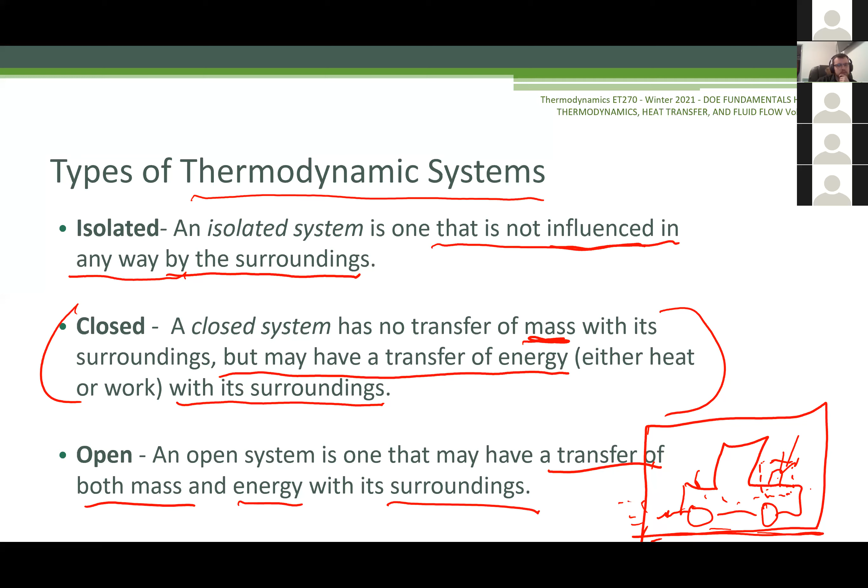Yeah, air has mass. There's 14.7 pounds of pressure sitting on every square inch of your body right now. And if the pressure went to zero, you would explode. It wouldn't be any good for you - the cells and molecules in your body would start doing weird things. So air has mass, yes. We're like fish at the bottom of an air ocean. If you took us out of the air, we wouldn't know what to do.

All right, this is more stuff about thermodynamic systems. So, thermodynamic equilibrium.

When a system is in equilibrium with regards to possible changes in state, that's when the system is in equilibrium. For example, if my room temperature is 72 degrees and my thermostat setting is 72 degrees, right now that room is in equilibrium, because if you consider the HVAC as the system that feeds the room, and you consider its feedback, the temperature sensor on the thermostat, once it reaches 72 degrees, it's in equilibrium with the system.

But is it, though? If you think about that 72-degree room, and the room next door to it is at 65 degrees, there's no equilibrium. So then there's heat transfer. Heat always travels from hot to cold, and that's going to be another thermodynamic law that we're going to learn about.

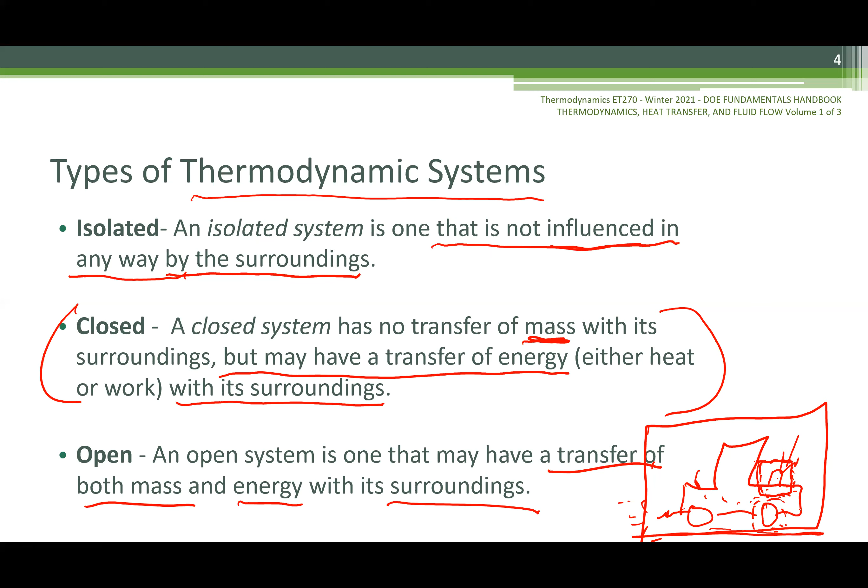So steady state is a circumstance where there is no accumulation of mass within the control volume. The system is independent of time. So how can I explain this one?

So let's say we have a tube. This little line right here that I'm drawing is a 5 millimeter diameter glass tube that goes like this, and then it spits out. Let's say we pour water into the tube, and then water comes out of the tube.

Let's say this tube takes 5 seconds to start water leaving from the bottom end. For water to begin leaving the bottom of the tube - basically it takes 5 seconds for any water entering the tube to reach the end of the tube.

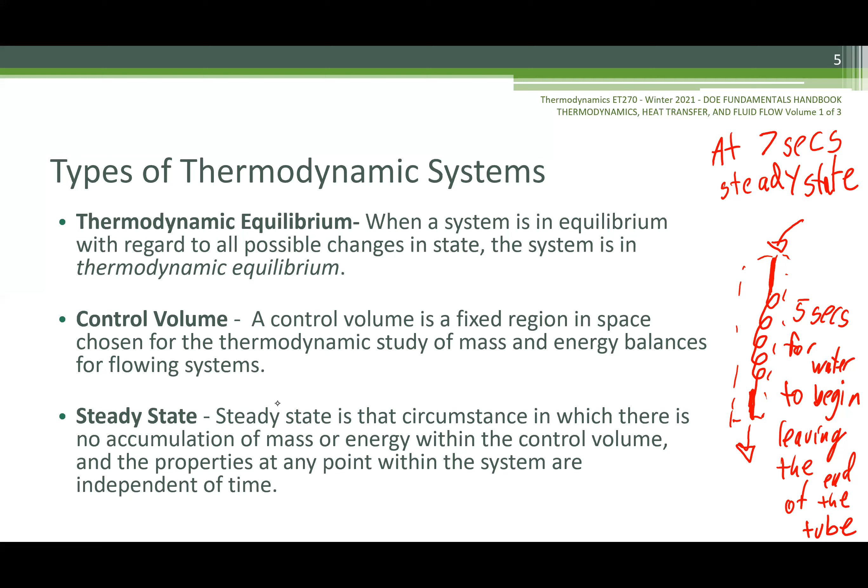All right. So here are some more thermodynamic processes. Whenever a property of a system changes, a change in the state of the system occurs.

So what's a property? You'll understand that more later. We're talking about properties - we looked at specific enthalpy, specific volume, specific internal energy, specific energy. Those are all properties of a system.

So here are just some of the processes that systems are categorized as. When a system in a given initial state goes through a number of different changes in state and finally returns to the initial values, the system undergoes a cyclic process.

A cyclic process would be a radiator in a car. That fluid really never changes, right? All it does is take heat and dumps it to the environment. It takes heat from the engine, puts it in front of your car, then in front of your car blows cold air through the radiator to cool off that radiator fluid, and that radiator fluid goes back through the engine to take more heat away from the engine.

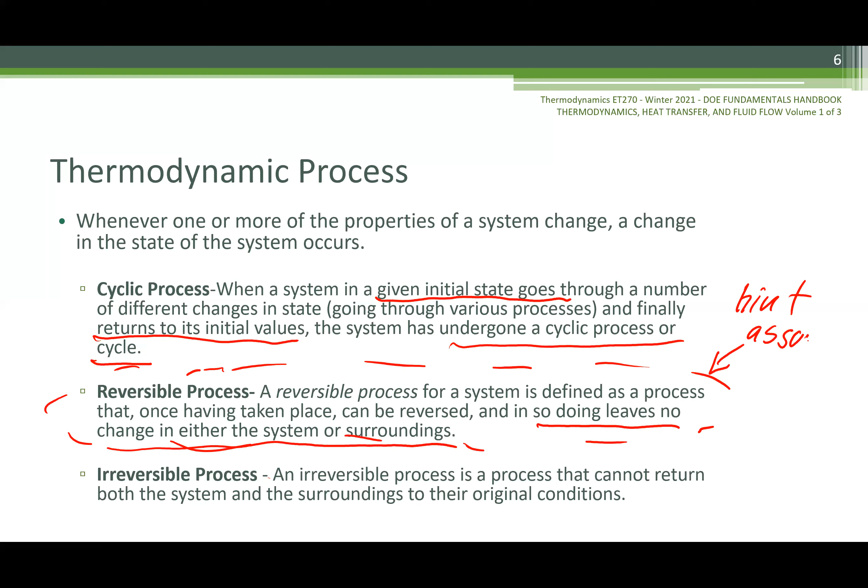There are whole books about entropy, and you still won't get it. All right, now irreversible - we just talked about that. It's the opposite of reversible, and usually is what the system is actually looked at as. But a lot of the processes we will look at will be treated as reversible - this will be an assumption that you make. You might say, 'it's a cyclic process and it's reversible.' I'm assuming it's reversible, because if you don't assume that, then where's the entropy and the heat loss, and where's this and where's that?

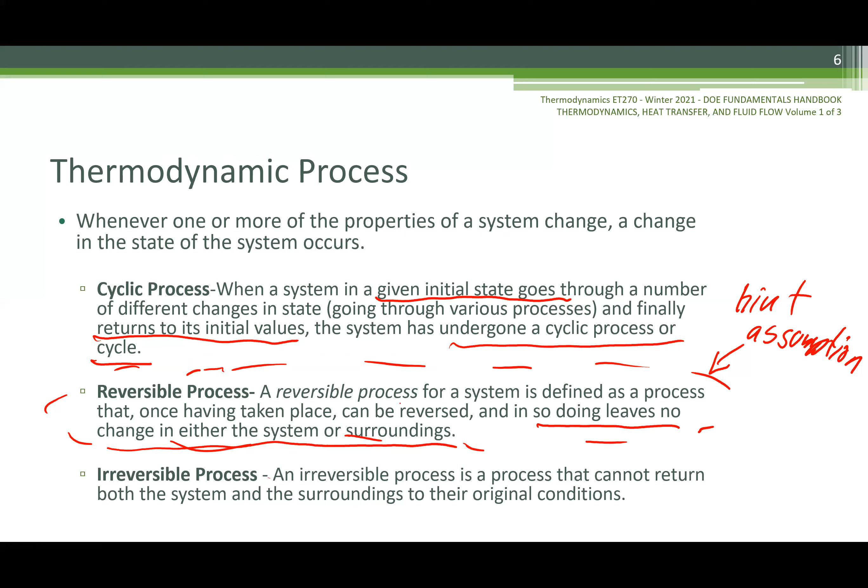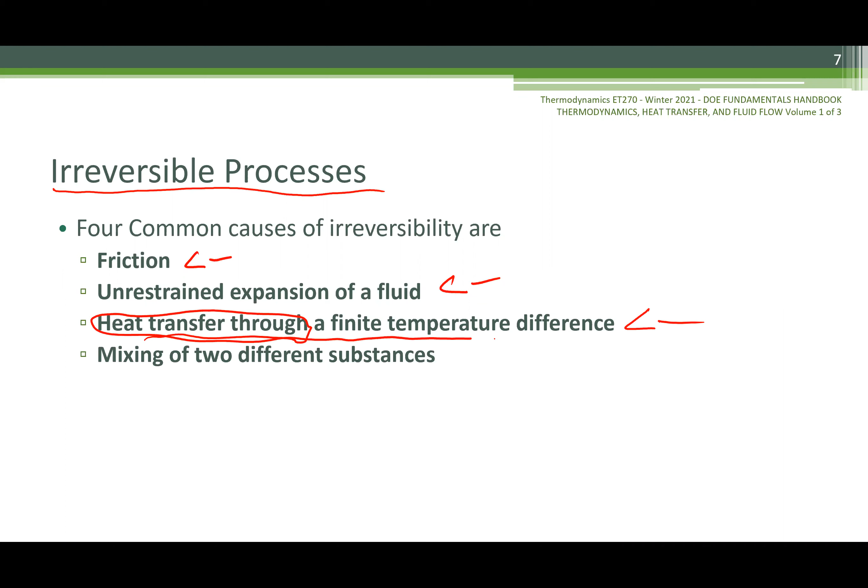All right, so this is just talking about some of the things we were discussing. What causes irreversible processes? Friction, just like our radiator example. Unrestrained expansion of fluids - happens in radiators too. Heat transfer through a finite temperature difference - this is impossible to stop if you really think about it. A finite temperature difference means a measurable temperature difference, right? There's a temperature difference for everything. So it seems everything we do is always an irreversible process, because there's always a temperature difference in everything we do.

And then mixing of two substances - when you mix two substances and go through a chemical reaction, how easy is it to unmix those two substances? It's not, you can't do it, right, without putting some type of energy into the process.

And making it equal - I just need to make sure you guys know what I mean when I say energy. If a process takes, let's say I mix two substances S1 and S2, and they go to this substance S1 plus S2, and it gives off heat equal to 20,000 BTUs. I guarantee, I bet my life savings, that it takes more than 20,000 BTUs to separate these substances back into S1 and S2.

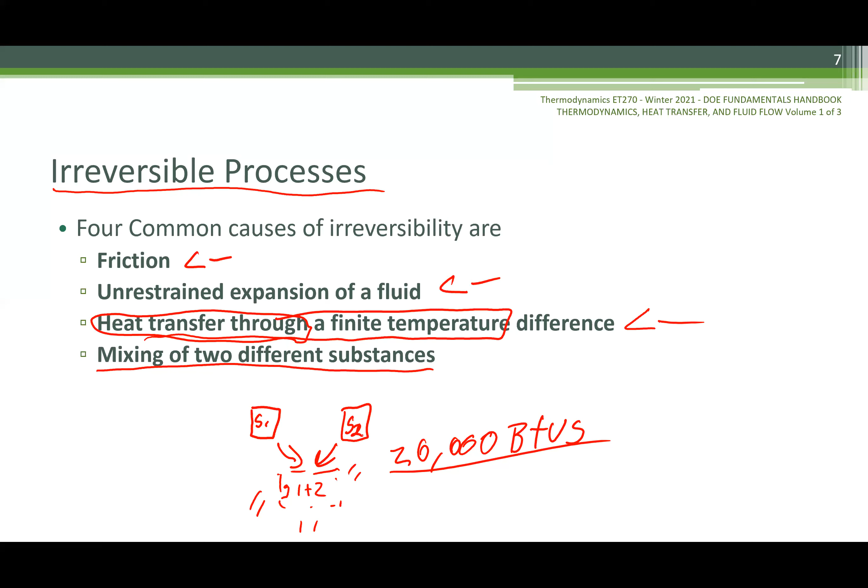An adiabatic process - this is a cool word I remember from my class. It's one in which there's no heat transfer in or out of the system. The system can be considered perfectly insulated. Now, is there any such thing as an adiabatic system where heat is not transferred in and out? No, there's no such thing, but it's part of that reversibility concept.

It's part of the concept. I am not considering the heat right now. This process is adiabatic. I'm not considering its surroundings or anything. It's perfectly insulated from everything. Are there any questions about that?

Isentropic process is one in which the entropy of the fluid remains constant. This will be true if the process the system goes through is reversible and adiabatic. So an isentropic process has to be reversible and has to be adiabatic. It can also be called a constant entropy process.

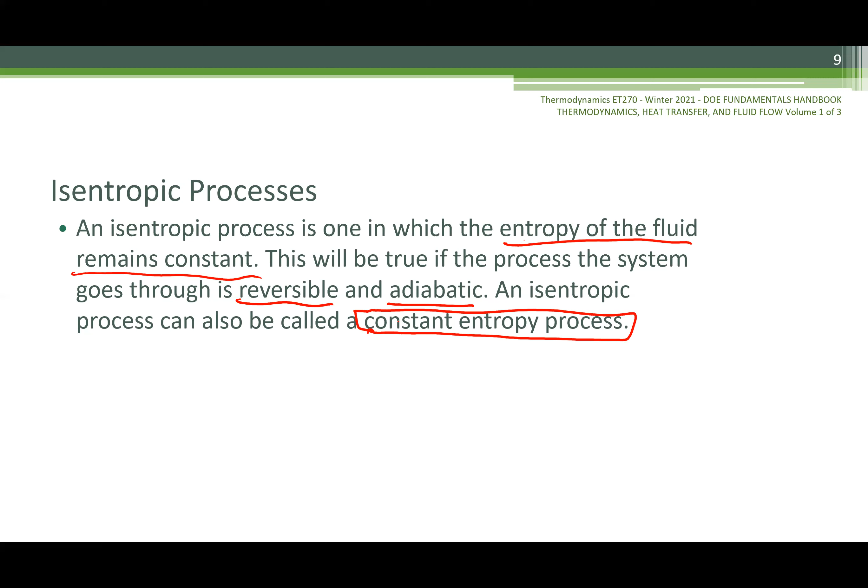So I just said, in order to equal isentropic, if it equals isentropic, then it's equal to reversible, and then it's being adiabatic.

Now here's a question: does an adiabatic process have to be isentropic? I don't think so. No, because it can be irreversible. I said no because it can be adiabatic and irreversible, and then it wouldn't be isentropic, right? Yeah, that's very true. It can be adiabatic and irreversible. Exactly.

Let me finish writing this. So, does an adiabatic process have to be isentropic, and we have said no. And we said no, and you're saying it's because it can be irreversible and adiabatic, right?

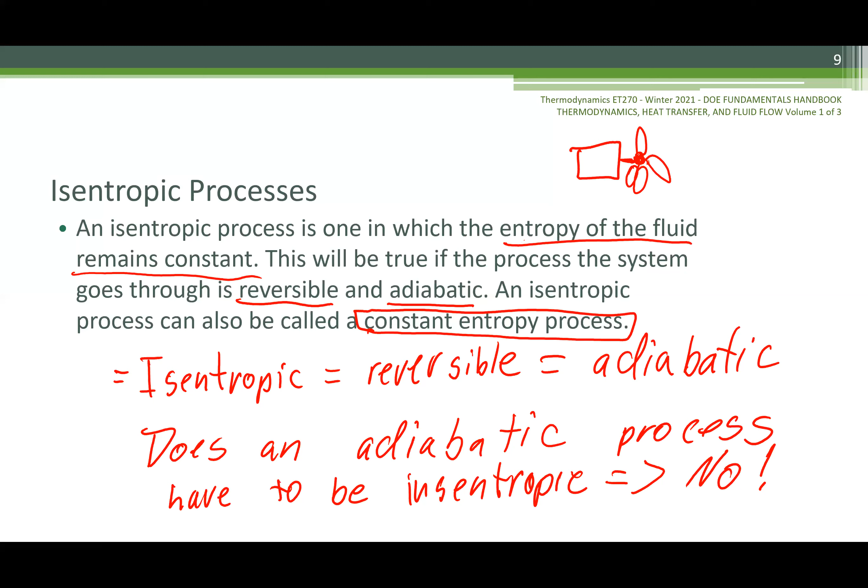So give me - this might be a little bit too much, but I'll give this one to you. Let's say we have an engine and it turns a piston. We have a motor and it turns a fan. We're not even looking at this fan. We're looking at this right here, the three leads of electricity going into the fan.

And then we're thinking about the energy coming into the motor, and then we're looking at the actual motor turning, right? So we know that the motor turning and the electricity is not a reversible process. I cannot turn the motor and put the amount of electricity back into the wires that the wires have supplied to the motor.

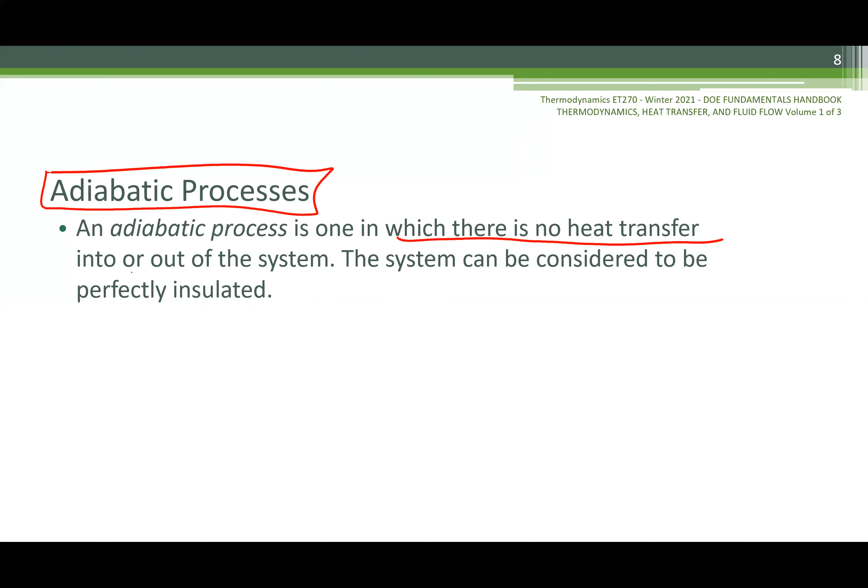But I can consider this process adiabatic, saying the temperature here is the same as the temperature here. So because it's adiabatic, we're saying there's no heat transfer in or out of the system. So we're saying, hey, this system up here, we're just looking at it for the electricity and the mechanical energy it produces. We're saying that the heat does not matter. It's an adiabatic process.

You see how that can be useful? We don't even care about the heat right now. We're just looking at the electrical energy coming in and the mechanical energy coming out. But it's not isentropic, right? Because, like I said, it's irreversible. So it's not a constant entropy process.

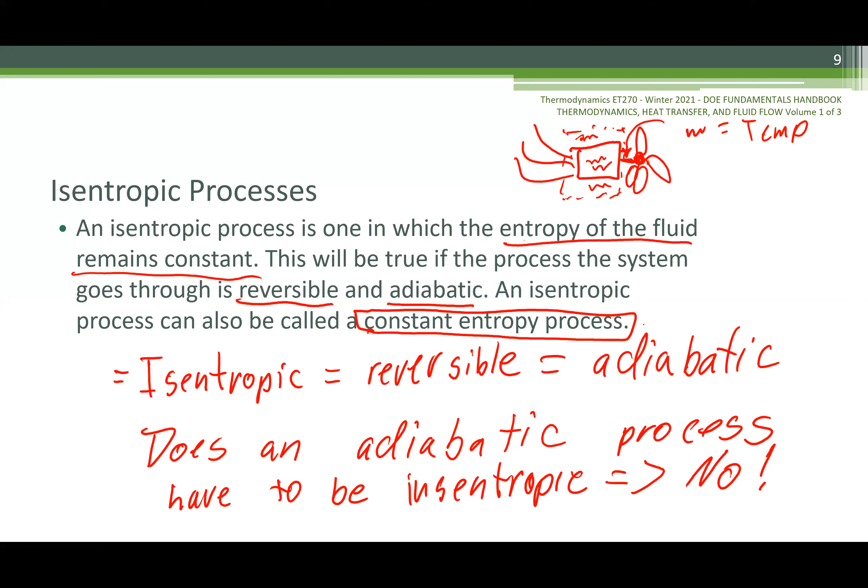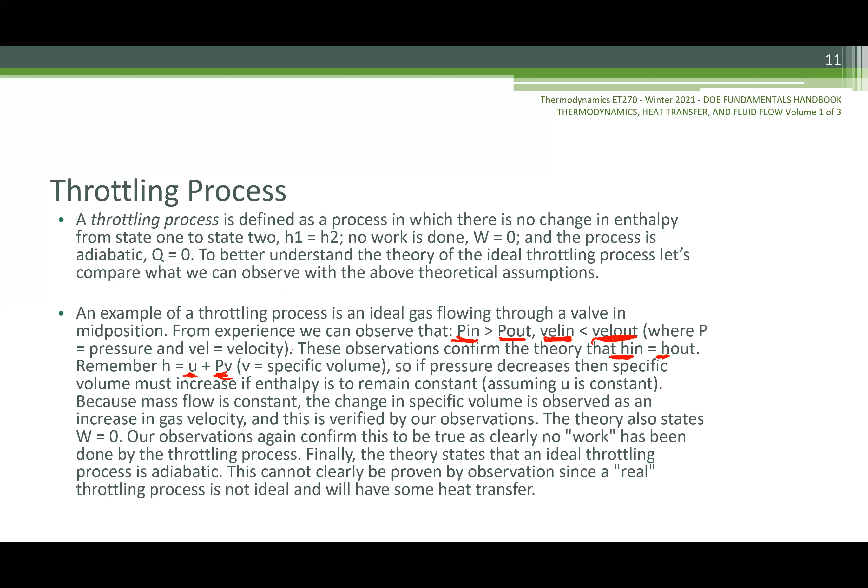These observations confirm the theory that H-in, enthalpy in, is equal to enthalpy out. Why? Because H equals the internal energy plus the PV energy. So if pressure decreases, then specific volume must increase if enthalpy is to remain constant. We are assuming the internal energy of the ideal gas is constant. Since mass flow is constant, the change in specific volume is observed as an increase in gas velocity, and this is verified by our observations.

The theory also states that work equals zero, so no work was done. It just changed in its specific volume, and that change in specific volume was compensated by the change in velocity and pressure.

Finally, the theory states that an ideal throttling process is adiabatic. This cannot clearly be proven by observation since a real throttling process is not ideal and will have some heat transfer. But this is the basic way that we analyze throttling processes. We'll look at it where...

Q equals zero, so it's adiabatic, and we're saying zero work is done. So we're saying, oh, it's a throttling process, and H1 must equal H2. So that relationship, P times V must stay the same, it must be constant, right? Pressure and volume can change, but what they equal in the last thing we talked about, which is PV to the N equals constant, must remain the same in order for a throttling process to be true.

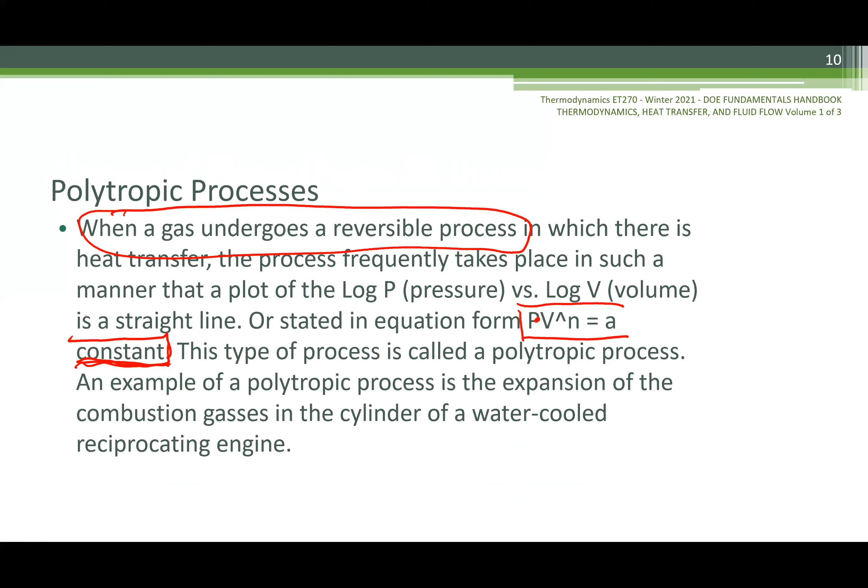To be really considered a throttling process, that again makes it easier for us to analyze the system by considering: hey, this is the throttling process, no heat transfer to the surroundings and no work is being done, H1 is equal to H2. Then you can analyze this system because you know these relationships. Thermodynamics is all about knowing the relationships.

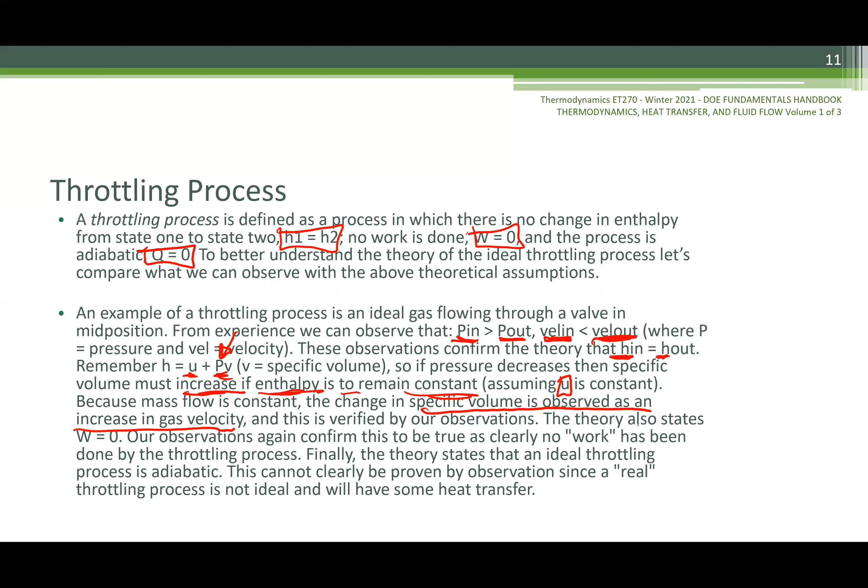All right, change of phase, page 31 through 39. Before we go on to change of phase, we can take a little break if you guys want to talk. I threw a lot of information at you, a lot of definitions, a lot of processes. Your head might be spinning right now. So if you don't have any questions, I understand, but if you have some questions, I'll happily go back and try to explain better.

I'm personally good. There's definitely some stuff that might be a little more intense, but it seems like once we do the homework, it might become a little more clear. But I'll let someone else ask in case I need to. You guys good? Feel free to ask, man, we're all trying to learn here. Oh, I'm good. I'm okay. Good. All right.

Okay, so now we're going to start looking at phases. What is a phase? A phase is different states - a phase is like a liquid. There are three phases of water: liquid, gas, and solid. Water is a working fluid that we use often.

So now there have been tables generated for different types of substances that we can use in order to tell what phase that liquid, solid, or gas is in. Guess what those properties might be that we can use to tell what phase a substance is in? They're specific... No answer? Like specific heat, or specific volume, yes, yes. If you know two of those properties about a substance, you can find everything else about that substance.

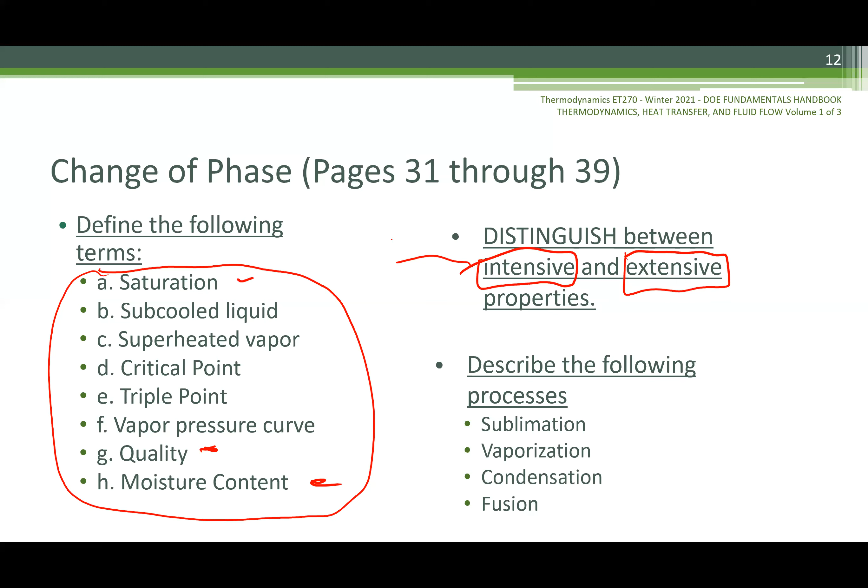So we're going to distinguish between intensive and extensive properties. The intensive, what are these? These are the specific properties.

And then we're going to describe some of these other processes, which are sublimation, vaporization, condensation, and fusion. All of these processes, you have forced water to go through at one point in your life. You just didn't know that you were making it vaporize, condense, fuse, or even sublimate. Sublimation is the coolest one, you'll see why.

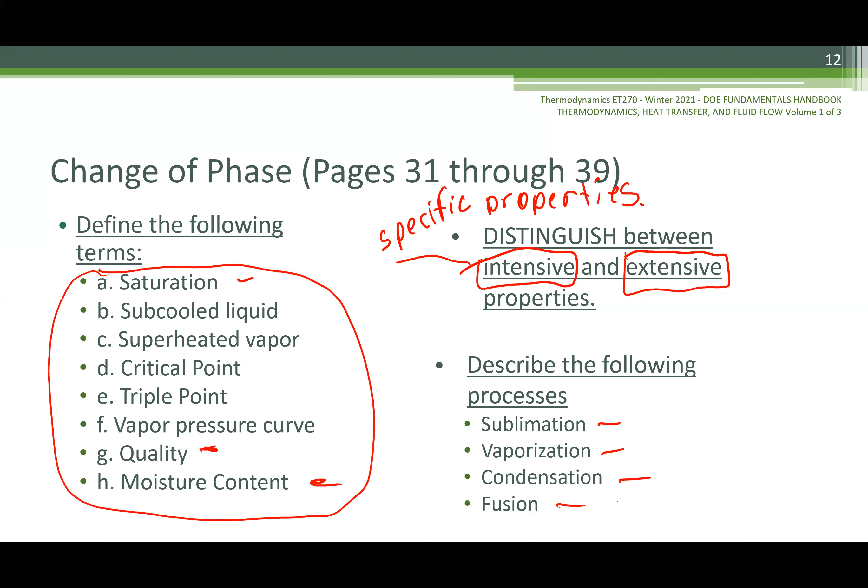All right, so classification of properties. We've been talking about this all term, but we can't talk about it enough. Intensive properties are independent of the amount of mass present. That's why we divide it by mass, because if we want to know the total of that intensive property, we multiply it by mass to find the extensive property from intensive properties.

Extensive properties are a function of the amount of mass present, just like I said. So we'll do little v. What does that equal to? Feet cubed divided by mass, right? So a function of mass. So to find big V, it is equal to little v times mass, and that will make you just have volume in this example. Does that make sense? Yes. All right.

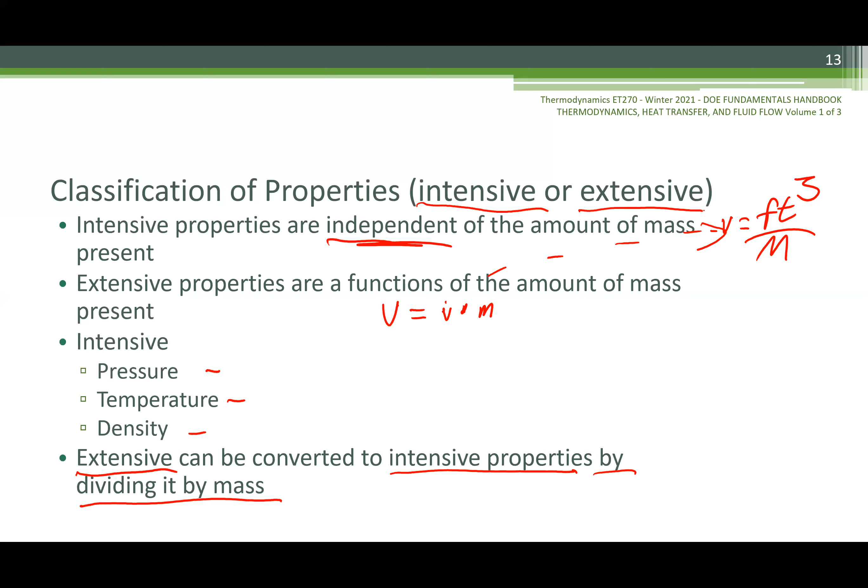Intensive properties: pressure, temperature, density. And extensive properties can be converted into intensive properties by dividing by mass. It is so important for you to understand the difference between intensive and extensive properties in this class. Their intensive properties give you the information to find out the extensive properties. Then once you find out the extensive properties, you can find out how much work, how much heat, or how much anything is being done. But you can't do it without the intensive property. You'll get an example later on in this lecture, but it's important to show you the importance of the intensive property. And here's one.

Here's a change of phase. So A, this is water, it's at 60 degrees and 14 psi. So B, it's that same piston, it increases in specific volume and pressure is constant. So something must be added to it because of that, so heat must be added to it. Then in C, it says water at 212 degrees, specific volume is steady and uniform.

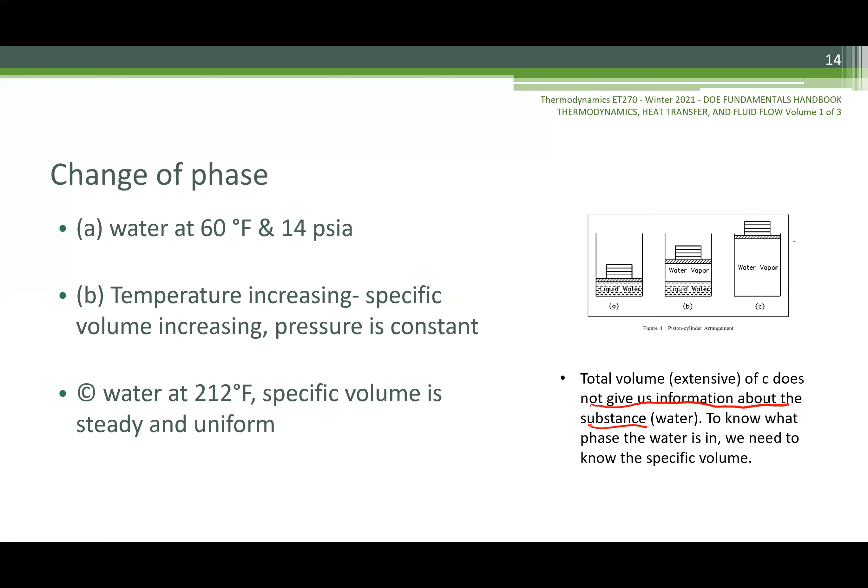So total volume, extensive, of C does not give us information about the substance. Why is that? Is it because we have no mass? We don't know the mass, exactly. For all we know, it could be liquid water or water vapor. Since we don't know the mass and how much it weighs, all we know is the volume. It could basically be taken up by any phase of the water until we know the actual mass.

So let's just say this here is irrelevant, we don't know any of this, and this here is irrelevant too, right? Now I'm going to ask you a question. If we knew the volume of this, is it possible for there to be 0.002 lbm of water in there? Yes, because it could be gas. Exactly. Is it possible for there to be 1,000 lbm of water in there? Well, if it was ice and there was enough ice to reach 1,000 pounds, definitely — but we don't know anything else.

Now let's say we still don't know the mass, but we know the volume, okay? Now let's say we also know the pressure. Can we find out what phase that water is in? Yes, we could, right? Because we could do all the math to see what pressure, in pounds per square inch, the water is pushing on the outside. Then we can convert that and look at the PSI along with the volume we know. Do we have enough though? I don't know, I think we need temperature.

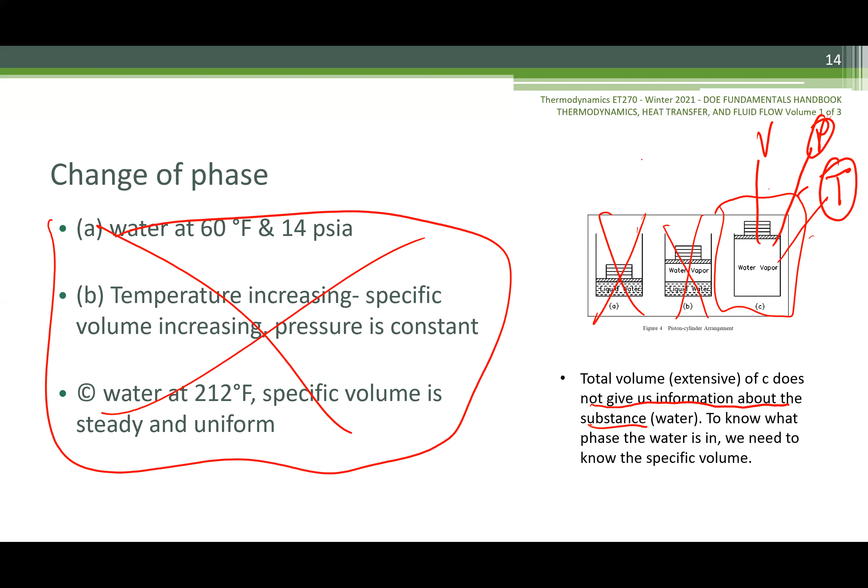All right, so now we're going to move on from the importance of understanding intensive properties using this example. And hopefully you'll remember one time while you're doing your homework, what's the importance of pressure and temperature.

Now we're going to look at the saturation vapor line. So saturation defines a condition in which a mixture of vapor and liquid can exist together at a given temperature. For example, saturation temperature or pressure is when a substance begins to boil. Water is 14.7 psi, which is atmospheric pressure at elevation 0, and 212 degrees. So at that pressure and temperature, water can exist as either a vapor or a liquid. Have you ever noticed that even though your water is boiling, it's not completely vapor? You still can feel the moisture in the air and it still can touch you and make your hands wet, because it's not all vapor. You breathe in water through your nose all the time, that's vapor.

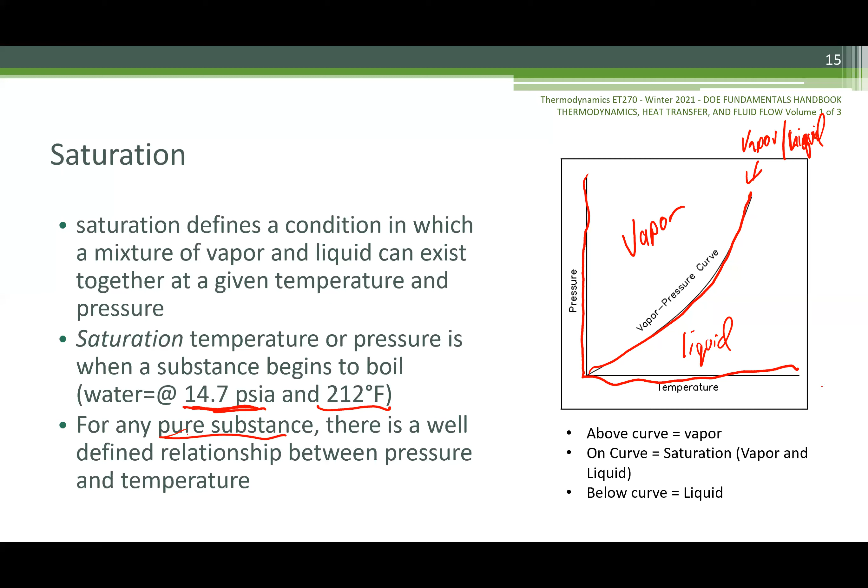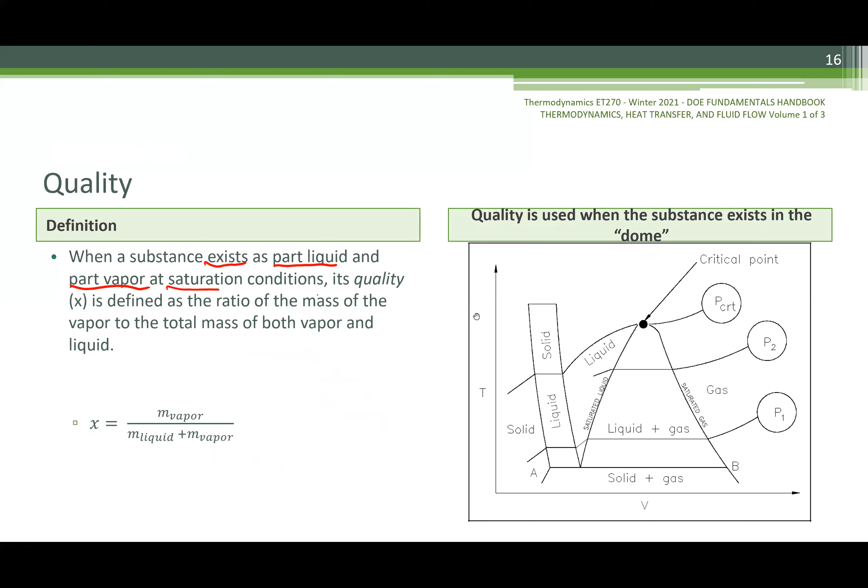So now we're going to talk about the quality of that substance. What is quality? It's when the substance exists as part liquid and part vapor at saturation conditions. So saturation conditions for water is here. Even though something along this line can equal a vapor and a liquid at the same time, we do not know the quality. QUA, quality. What is the quality? It's defined by the ratio of mass of the vapor to the total mass of both vapor and liquid. So if at 212 degrees, you're saying, okay, what part of it is vapor and what part is liquid? When we're thinking about gas, we're thinking about water. Well, you're talking about the quality - what percentage of that control volume is vapor?

And here, realize these axes have changed significantly. Quality is used when a substance exists in the vapor dome. Now what I mean by axes - notice that this one is temperature and this one is specific volume. Now I'm going to go back to the other one: this one was pressure, and this one was temperature, right? So that's the relationship between pressure and temperature. But now I'm going back to the other one to say, all right, this is the relationship between temperature and specific volume.

And here's where it's really going to mess with you: this line here - you see this dome right here? Notice it says saturated liquid, saturated gas. This line here, I'm going to star it - it is the same line as here. It's just looked at from different axes. Same line. This has a different characteristic, a different behavior because it's pressure and temperature.

But when I go to this... now it doesn't want to change. Oh, there it goes, all right, now I can see, I don't know what happened. Is everybody following me? This is a big jump. Are you following? You catching what I'm putting down? Just a different shape, right? Yeah, it's a different shape.

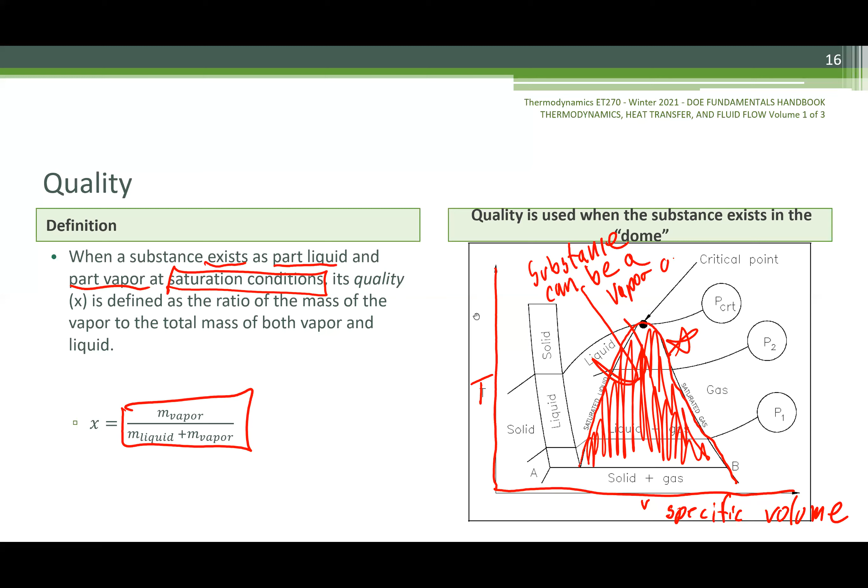But here, I'm going to throw another thing at you. This is called the vapor dome. Right here, this is what we call the vapor dome. And within this dome, a substance can be a vapor or liquid. It can be a vapor or a liquid. So this is where you define your X. This X right here is defined by where it's at in the vapor dome. It's very interesting, but now notice something else - how these pressure lines are straight in the vapor dome, right?

What does that mean, like a constant pressure or something? Yes, constant pressure. The pressure may stay constant inside the vapor dome, and it depends on the specific volume of the substance in order for it to go into the gas part of the vapor dome or the liquid part. We call this up here the critical point, where you get superheated stuff that we're not really getting into above this.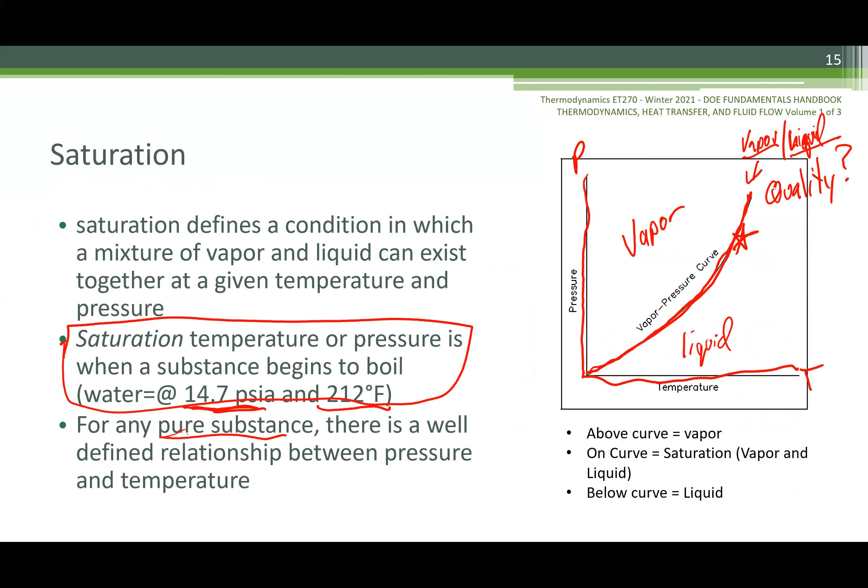So moisture content. Moisture content is the opposite of the vapor content or quality. Moisture content equals 1 minus X. So it's really just the opposite of what the vapor content is.

If a substance exists entirely as a vapor at a saturated temperature, it's called saturated vapor. When a substance is completely a vapor, the quality X is 100%. You might think, why do we call it quality when it's complete vapor? Well, it's because we use a lot of steam, and steam has the most quality, the most enthalpy in it when it's a complete vapor.

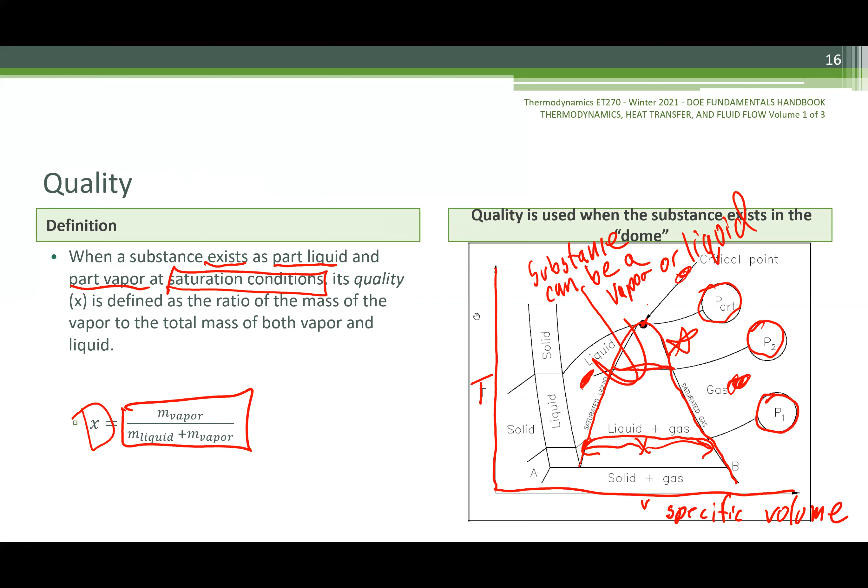We're going to be looking at these types of graphs for the rest of the term. You're going to get to know these graphs: PV graphs, TV graphs, many different types. You're going to look at a lot of different graphs and try to grasp how you use them.

So we've talked about moisture and vapor. Now we're going to talk a little bit more about this temperature-volume relationship, I like to call it specific volume relationships. So we'll start here with line A, B, C, D. That means line A to B, B to C, C to D.

Water at 14 psi, and then I put temperature at 212 degrees. How do I do that? Oh, it is, it's supposed to be temperature. I'm just telling you what it is. Okay, I need to correct that, my bad. So water is at 14 psi at 212 degrees.

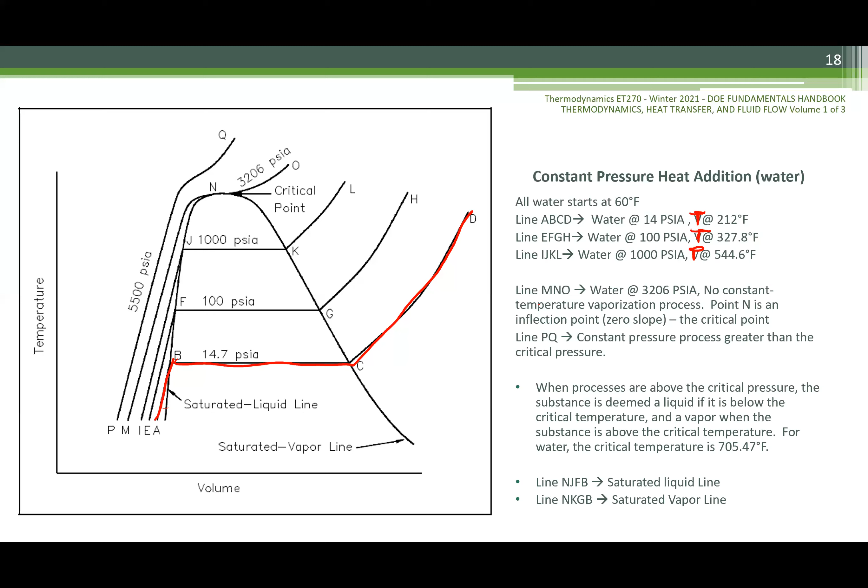As the specific volume goes up—I don't know why this should be specific volume, volume doesn't matter, it's extensive, that was a mistake in the book—as the specific volume goes up, this is where the pressure line will be when you're talking about a temperature specific volume graph.

So line EFGH is here. As the pressure goes up to 100 psi, it takes a little bit more temperature to get it into the vapor dome. It rides the pressure line longer and stays in the vapor dome a little bit less time than it does at a pressure of 14.7 psi.

And then the same type of dynamics happen here from G to H. The line IJKL has the same dynamics, but here it's at 1,000 psi, so it's going to take a little bit longer to get into the vapor dome, and the temperature has to increase drastically to get it there. Then it stays in the vapor dome less time before it turns to a complete gas.

Now line MNO is at 3,206 psi, no constant-temperature vaporization process. So here it goes directly from a liquid to a gas. This is the critical point. Point N is the critical point, an inflection point with zero slope.

So at this temperature, notice at M here, when the water is at 3,206 psi, the water will never go through a process where it could be liquid and vapor at the same time. It's either a liquid or it's a vapor, one or the other.

When processes are above the critical point, the critical pressure, the substance is deemed a liquid if it's below the critical temperature, and a vapor when the substance is above the critical temperature. For water, the critical temperature is 705.47 degrees.

Now, just to give you one last thing about this, and please read this chapter because it's very important: line NJFB is the saturated liquid line. Line NKGC—what did I put? NKGB, what, NKG? I was wrong, it's C—this is the saturated vapor line.

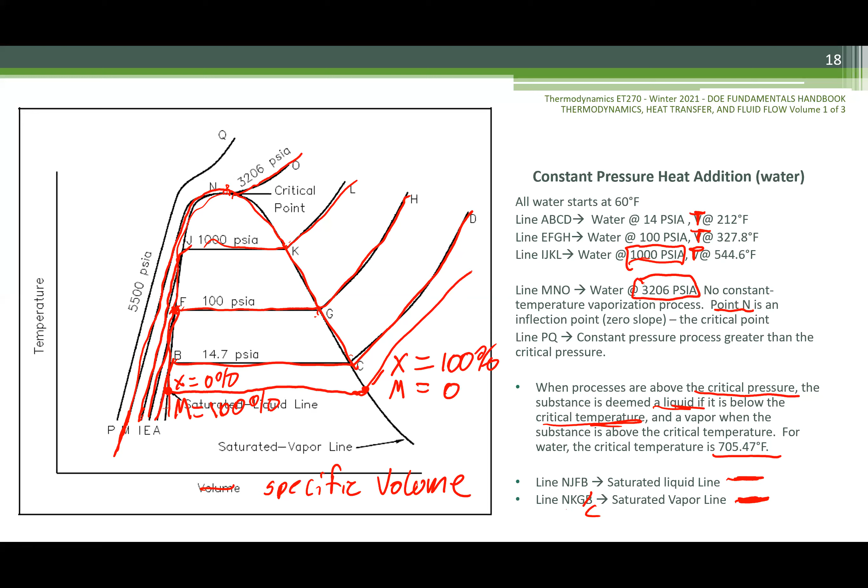So, other phases when heat is added. Now we get to talk about some of the other definitions. When a substance changes from a solid to a liquid, i.e. ice is melting, the temperature, while the ice melts, remains constant. You never knew that, right?

What happens is the latent heat of fusion. The temperature remains constant, but it's melting. Energy is still being added to the substance, from the water. So the latent heat of fusion is what happens when fusion happens, and it is the extra amount of energy that it takes to melt the ice. That's what is called the latent heat of fusion.

Now, sublimation is when a substance changes from a solid directly to a vapor, no liquid state. There is a certain amount of energy you can put into water and it will instantly change from ice to vapor, and that's called sublimation. I think it's pretty cool. You just change ice straight to vapor. No liquid, no moisture content, no quality. It just goes straight to vapor.

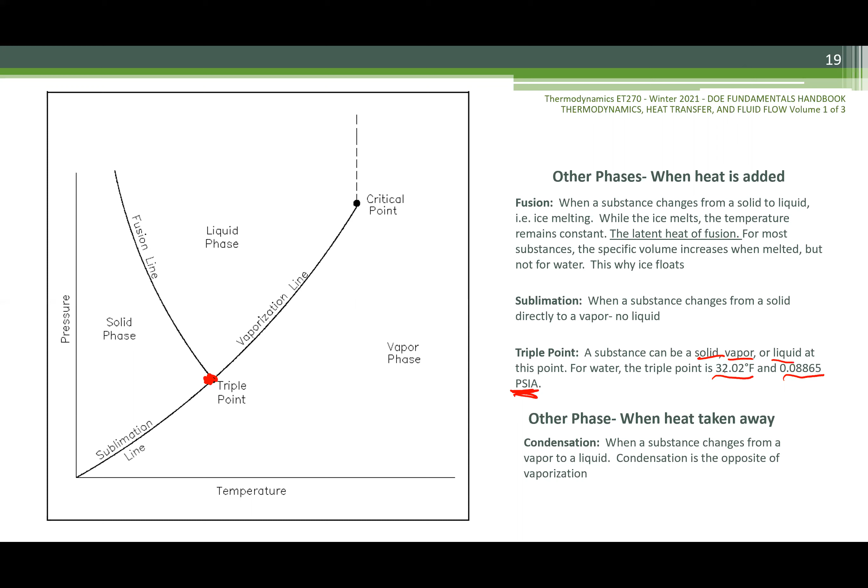I realized I had a question from the homework that I forgot to ask at the beginning of class. It's specifically the question that talked about if you have like 15 pounds of steam, and then release 5 pounds of steam. Hold on, let me pull it up. Someone else wants to ask too, they can go ahead.

That one - I wasn't sure, when you release the other 5 pounds of steam, it says you have 2,000 psi. My rationale tells me that would affect the psi when releasing the 5 pounds of steam, but I wasn't sure how to quantify that in the problem, or if you were supposed to. So I kind of just wrote the assumptions, and I'm assuming the pressure remains unchanged, but I know it probably doesn't. That's what I thought too.

Let me look at the homework, the exact question. Intro to thermo. We're talking about week 2, right? That would be last week's homework, question 4 on homework 2, if I remember correctly.

Determine the PV energy, right, in a 15-pound mass of steam at 1,000 psi in an 18 foot cube tank, when 5 pounds of steam is released from the tank. The volume is still the same. What is the new specific PV energy of the steam left in the tank?